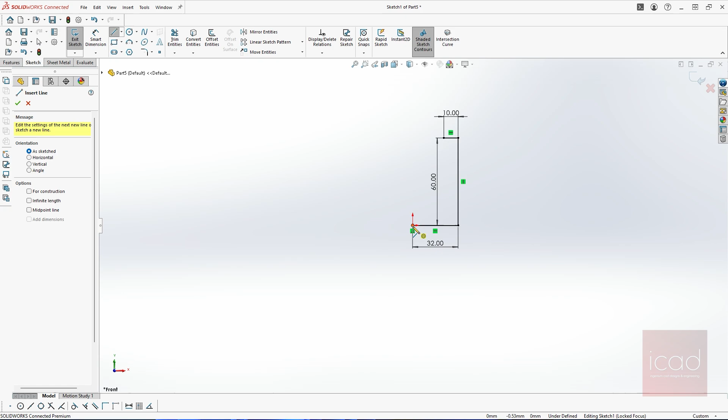Go to front plane and I'll just start sketching the simple thing first. I'll start from this point, take a 32 mm line, then a 60 mm line vertically, and another 10 mm horizontal line, and we'll come back to this later. Again, we'll take a 12 mm vertical line and a 7 mm horizontal line, and this should be 22 mm, and we'll connect this. That's it. So this is the first thing that we're going to extrude.

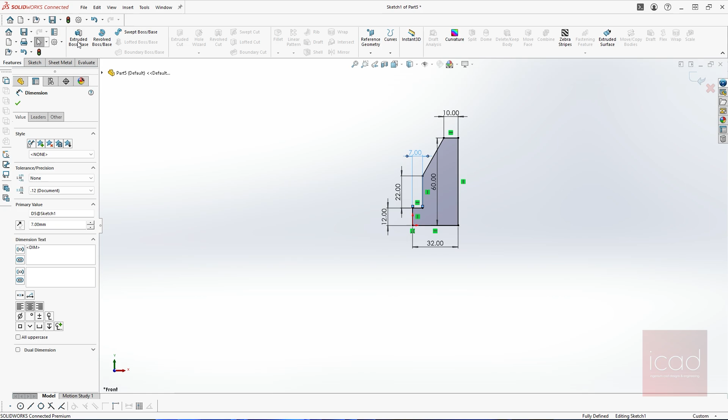Go to features, extrude, and I'll extrude it from mid plane again for mirror purposes and for 45 mm. Done. Next thing is very simple, I think it shouldn't take more than 4 or 5 minutes. Next, again I'll go to front plane.

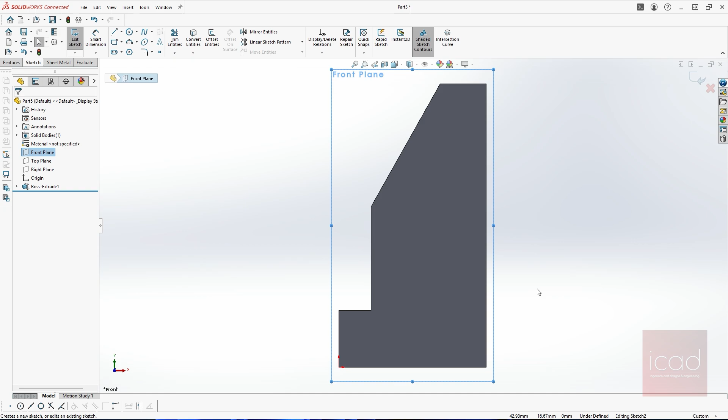I'll take a line from this vertex, draw a horizontal line of 30 mm. I'll take an arc, with a radius of 10 mm. Alright, done.

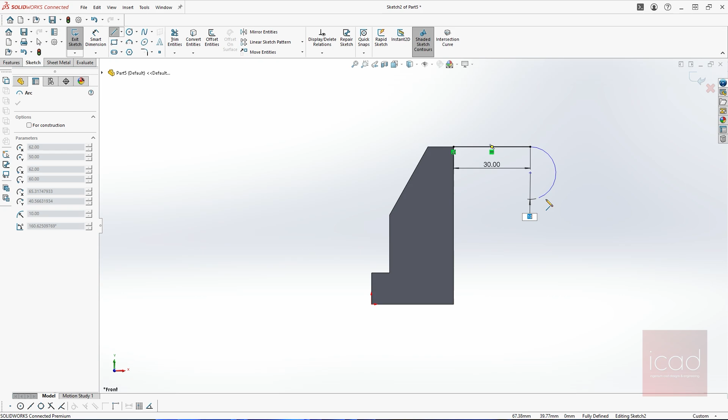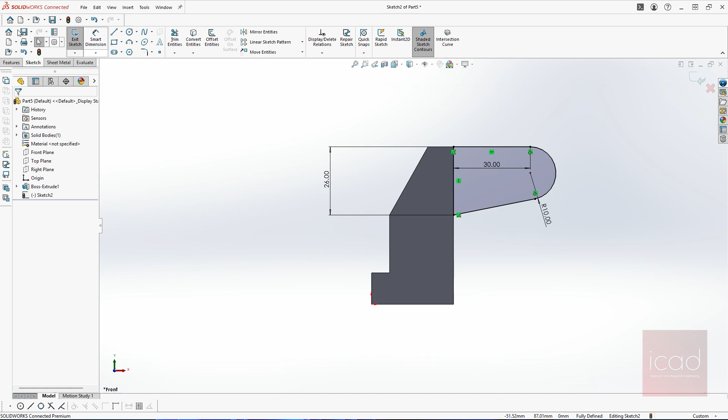Next, again at the line which extends, and I'll connect this. Now what I have to make sure is this is 26 mm, and make sure this is tangential. Now it's not, but I just have to click on these two and give the relation tangent. And there is an inner circle of diameter 10 mm.

It's a hole. I mean, I can do the hole later, but since I can already extrude them with the hole, I would choose this over providing the hole later. And now, yep, that's it.

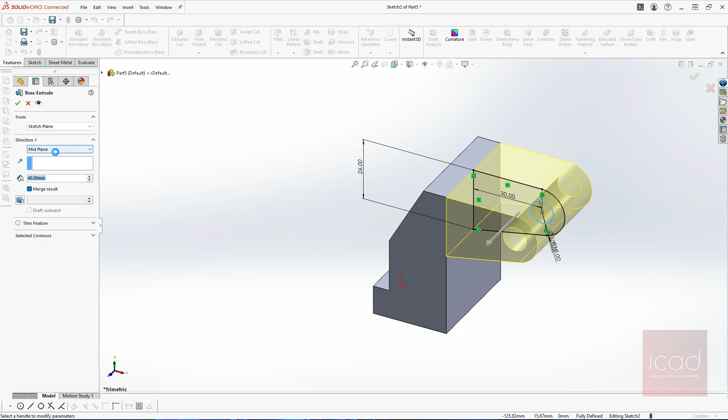Now the next step is to extrude from offset, not from sketch plane, because as you can see there is a 13 mm gap between the two things. Instead of mid plane, I'll go to blind, and the thickness of this extrusion is 10 mm, but it starts from an offset. The offset is 13 divided by 2. Done.

And I will just select front plane and mirror this particular feature. I'm sorry, secondary mirror is nothing at the moment. Done.

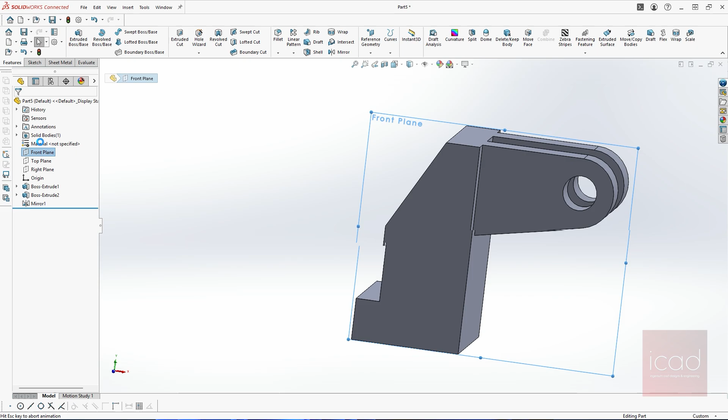And next is another extrusion over here. I'll do it differently. I'll select circle, and this circle has a diameter of 8 mm, and from the same center point we're gonna draw another 20 mm circle.

Next is we need to make sure the lines we draw here are tangent here.

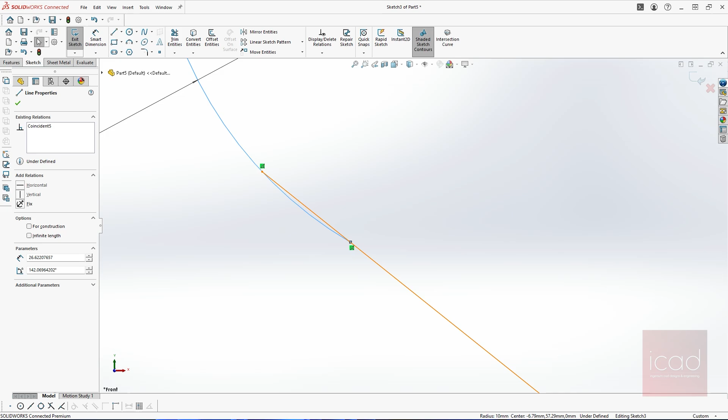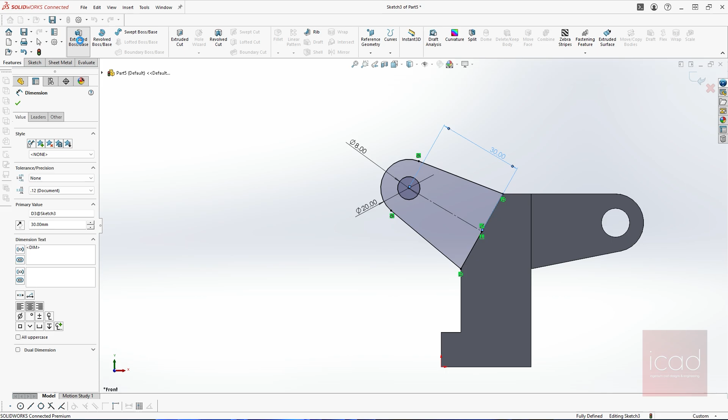Okay, I made this one constraint. This has that. Now we're good. And the dimension of this particular line should be 30 mm. That's it. And we need to now extrude this for 12 mm from mid plane, again not from blind. So I'll go to mid plane. Instead of 10 it will be 12 and done.

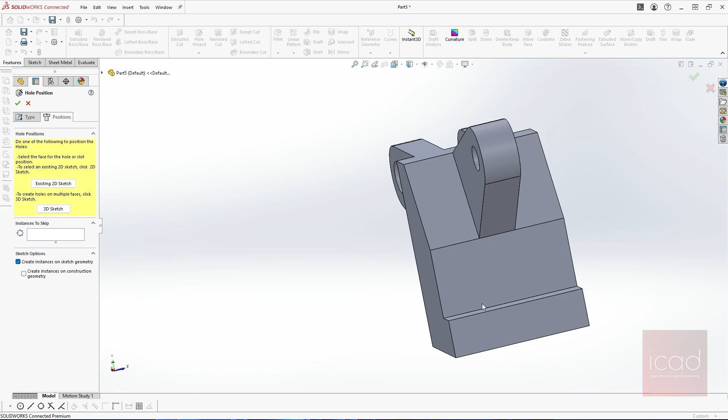There is one last step, that is providing the hole over here. I go to hole wizard, position, select this, and in the type make sure you're not in custom sizing and you're in dowel holes, and the size of the hole is... Okay, I don't see any size of the hole, so I'm gonna assume it's 10 mm.

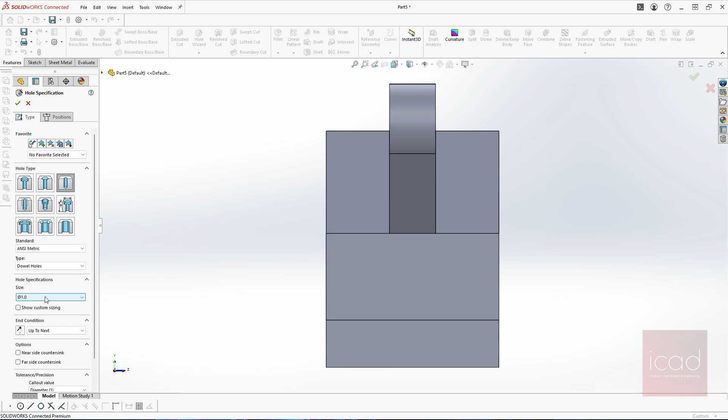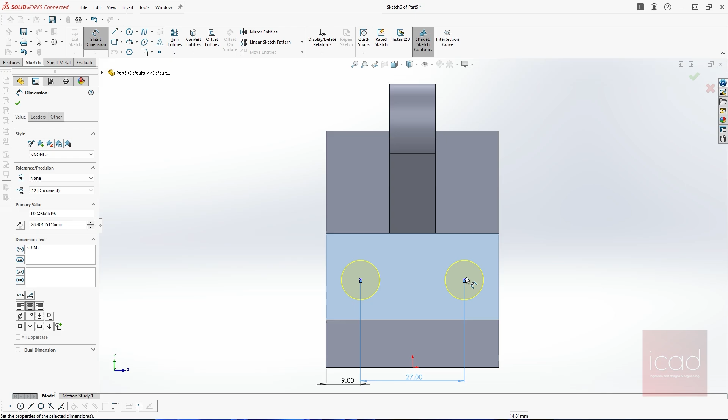And let's go to position. This is our face. Hole number 1, hole number 2. There's a dimension. This should be at 9 mm from this line. And this is 27. And there's one more, the vertical distance, that is 12 mm.

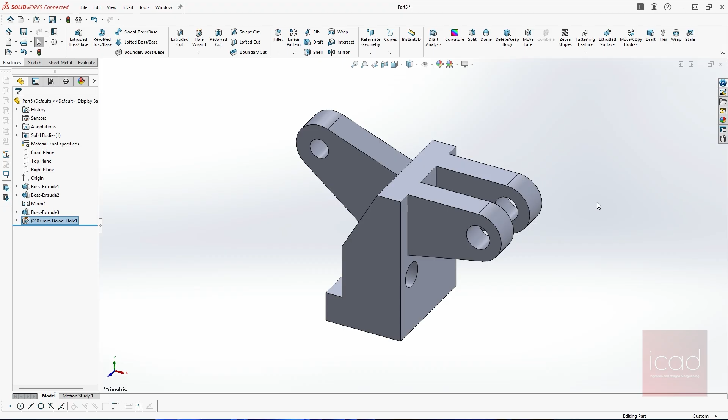And make sure both your holes are horizontal. The center points of the holes must be horizontal, and that's it. There you have your hole, and this is the fifth model.